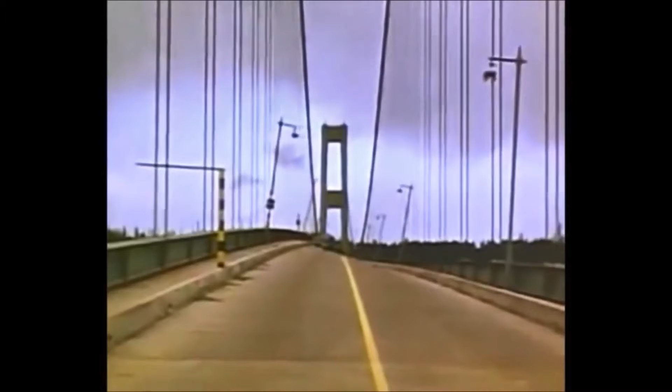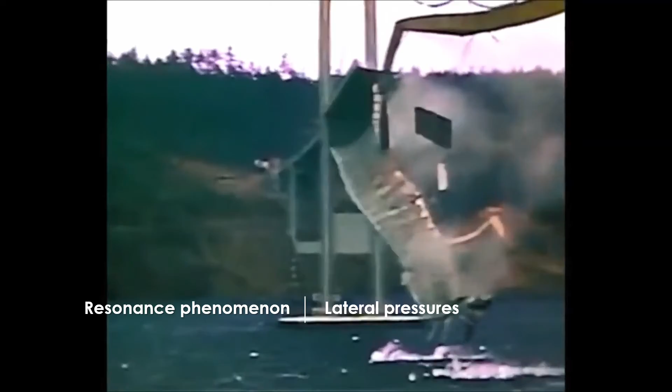Our bridge is shaking absurdly. The reason why the bridge swings in the wind, enough that even a man can walk on it, is due to its natural frequency. Any building has a natural frequency. The vibration that reaches the natural frequency through the resonant phenomenon causes the building to shake even more. When the building cannot withstand the lateral pressure, it finally collapses.

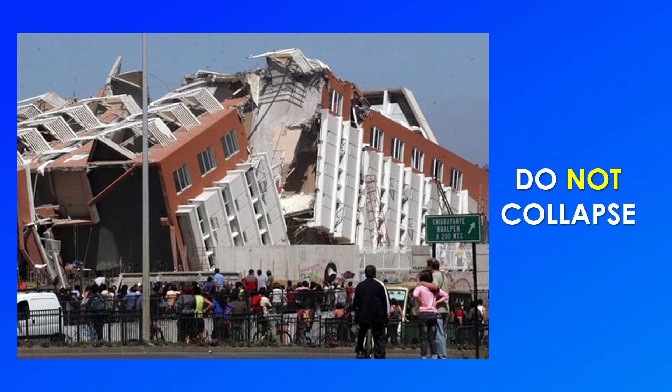High-rise buildings are prepared for wind and earthquakes so that they do not collapse. The reason for a skyscraper's collapse from these factors is essentially the same: it's because of the vibrations I mentioned earlier.

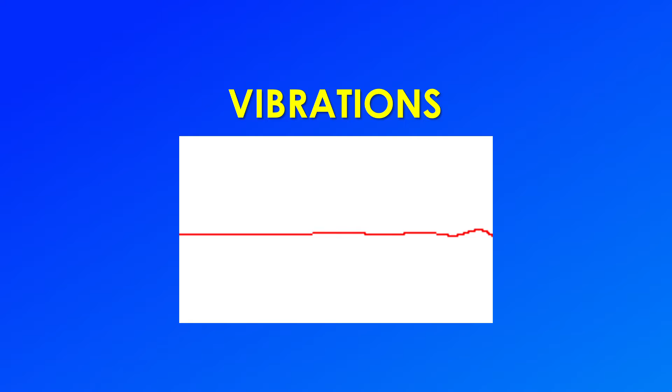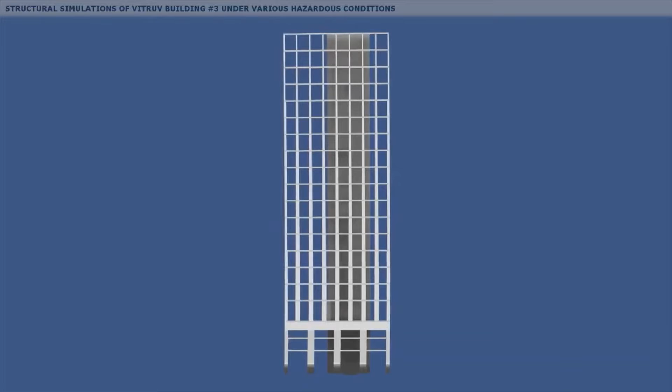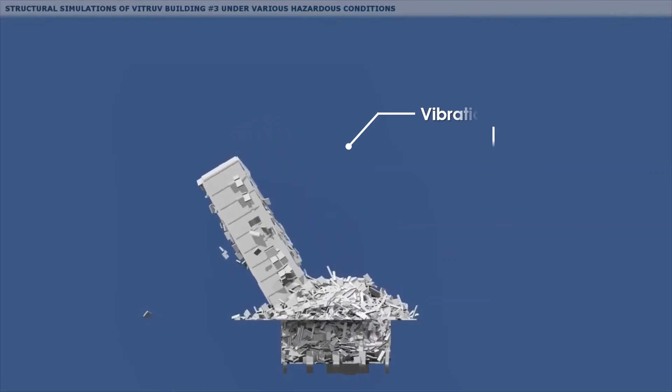Earthquakes cause vibration in the ground beneath buildings. As shown in the video, when an earthquake occurs, the building vibrates. I'll show you the process of collapse in detail. The building initially holds out with inertia, then moves the same as the vibration as the frequency increases, and the walls or pillars of the building cannot withstand the lateral pressure caused by vibration, so they collapse.

However, the fact that a building is shaken by vibration is not in itself evidence that it is not earthquake-safe. Rather, a well-shakeable building is a safer structure that withstands earthquakes better.

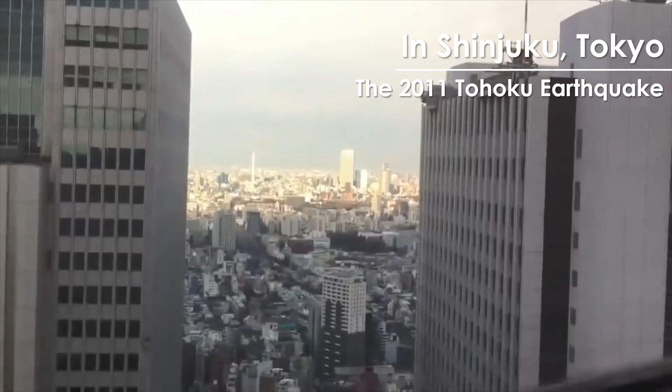This video shows a skyscraper in Shinjuku, Tokyo, where vibration was transmitted during the 2011 Tohoku earthquake. As you can see, the buildings shake side to side as if they are dancing. This is not a poorly built building, but rather a well-designed seismic building. It is designed to shake flexibly and naturally according to the vibration.

When it comes to how much a building is prepared for an earthquake, it's not a matter of strength, but a matter of flexibility.

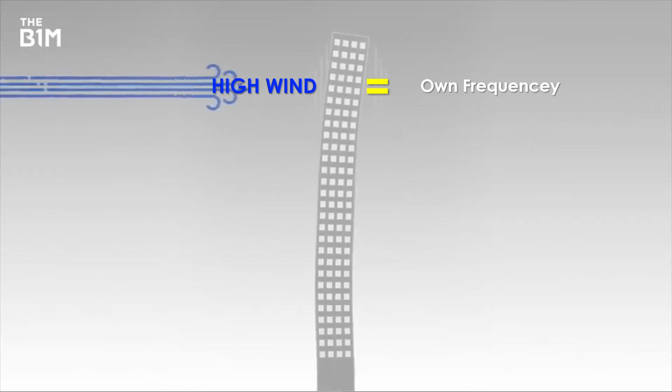The same goes for wind. Each skyscraper has its own frequency. While any such movement may initially be minimal, high winds can create vortices that can match the frequency of the building they move around, causing noticeable swaying and shaking motions for those inside.

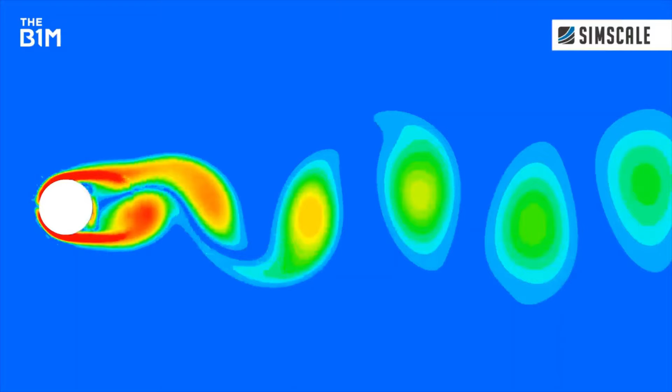Most buildings withstand irregular wind vibrations. The problem is that the vortex is not a regular wind. As wind moved around the top of those tall structures, vortices were being created in a process known as vortex shedding.

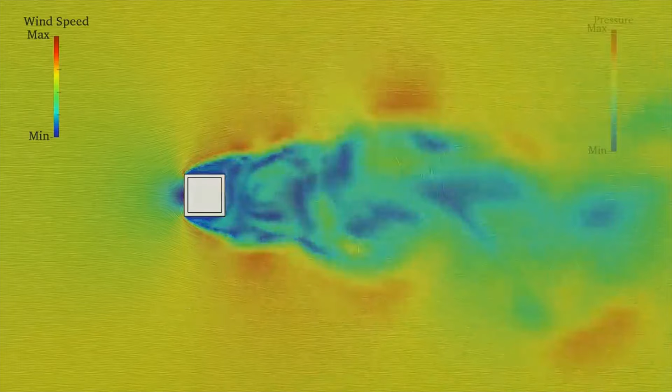This process, much like water flowing downstream, acts differently on obstacles depending on how streamlined they are. In the case of these buildings, the sheer block walls created a bluff obstacle that wind had to flow around. As strong winds moved around these structures, areas of low pressure emerged on the opposite side, creating suction forces that pulled at the buildings, causing them to sway back and forth.

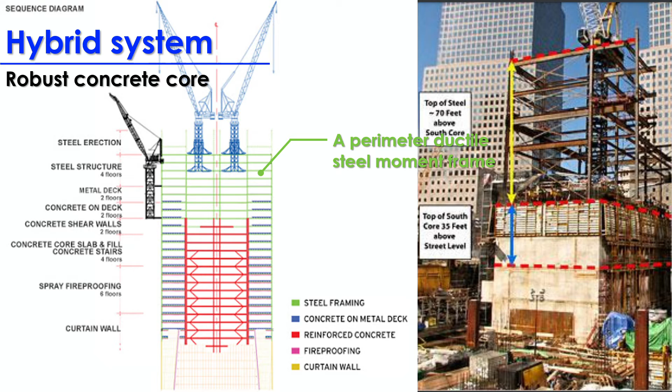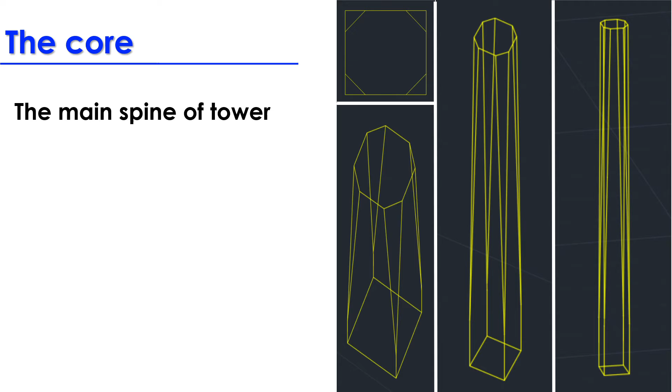The tower structure is composed of a hybrid system combining a robust concrete core with a perimeter ductile steel moment frame. The reinforced concrete core wall system at the center of the tower acts as the main spine, providing support for gravitational loads as well as resistance to wind and seismic forces.

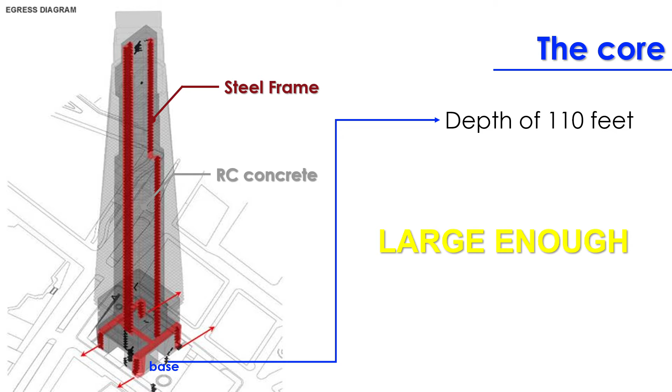The core is approximately square in footprint, with a depth of about 110 feet at the base, large enough to be its own building. It houses mechanical rooms and all means of egress. The core structure is compartmentalized with additional interior shear walls in orthogonal directions.

The concrete strength ranges from 8,000 psi to 14,000 psi from the base to the top. As for crumbling, the towers are held up by a steel framework that is elastic enough to take the bending without damage, giving the building enough flexibility for safe vibration along the frequency of an earthquake.

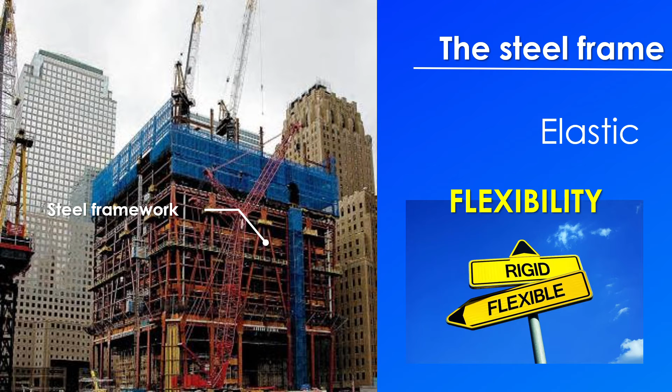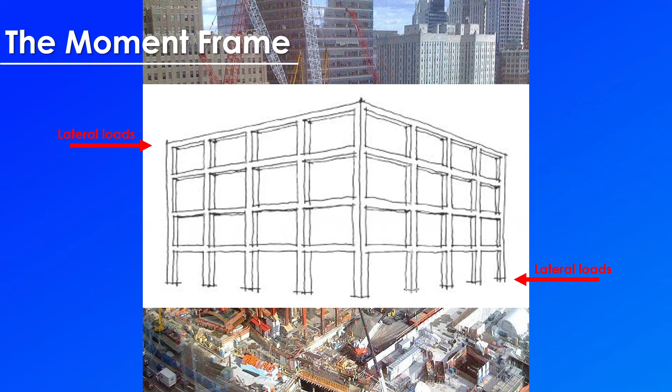A ductile perimeter moment frame system is introduced for redundancy and to further enhance overall building performance under lateral load. The perimeter moment frame wraps around all vertical and sloped perimeters, forming a tube system.

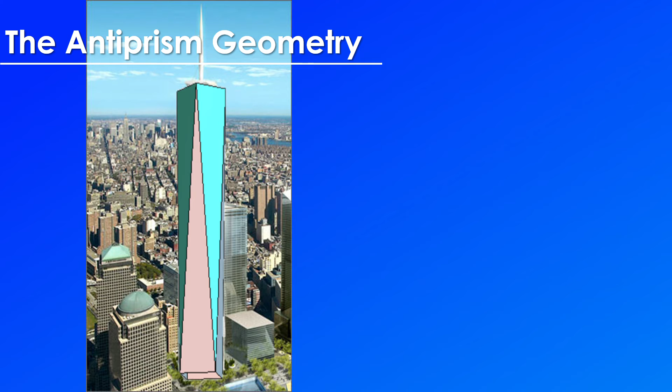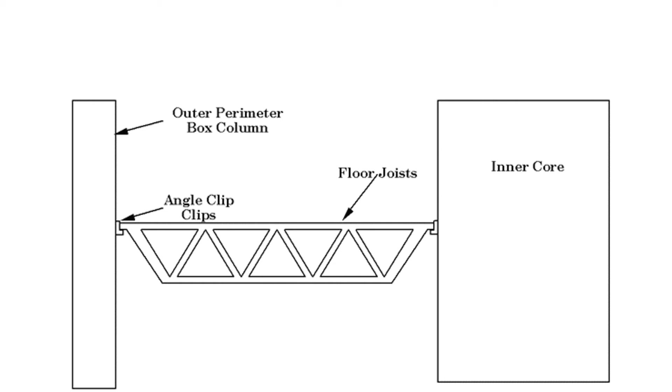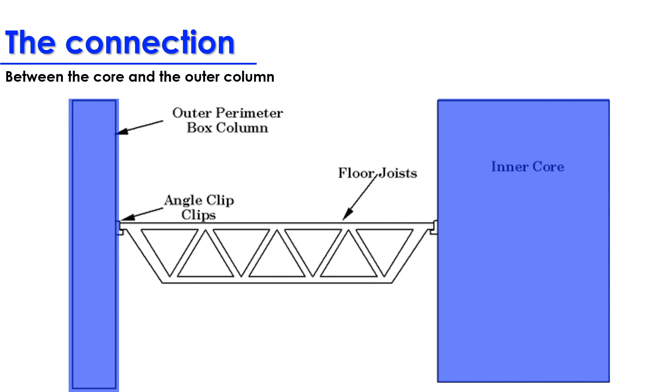Along the height of the tower, the antiprism geometry creates unique structural conditions, which necessitated the design and fabrication of special nodal elements using relatively large plating with significant capacity for load transfer. For further enhancement of the lateral load resisting system, the concrete core at the upper conical levels is connected to the perimeter columns via a series of multi-level outrigger trusses in both orthogonal directions.

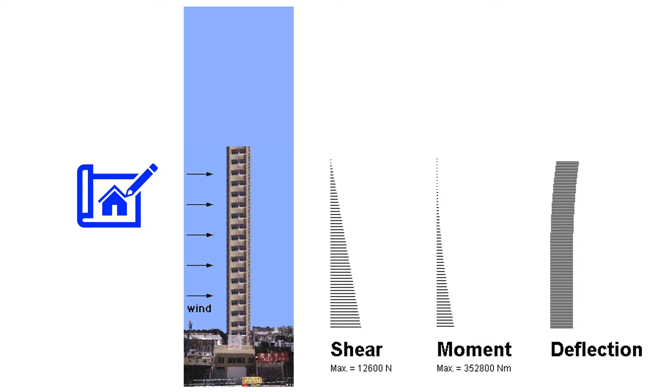During the design of a building, special care is taken when considering wind load. Buildings taller than 10 stories would, for the most part, require extra steel for side-long framework. Also, One World Trade Center's height and its slenderness imposed stringent demands on the overall strength and stiffness of the structure.

The structure has been designed for wind load requirements of IBC 2003, with due consideration of NYC local wind climate conditions. In order to meet those demands in an economical way, high strength concrete was utilized and it composes the core of the tower.

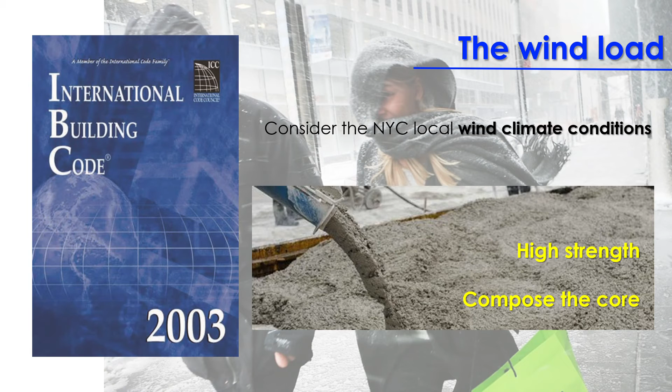In addition, a series of wind tunnel tests were performed to ascertain a more accurate measurement of wind loading and wind responses of the tower with respect to hurricane wind load effects and human comfort criteria.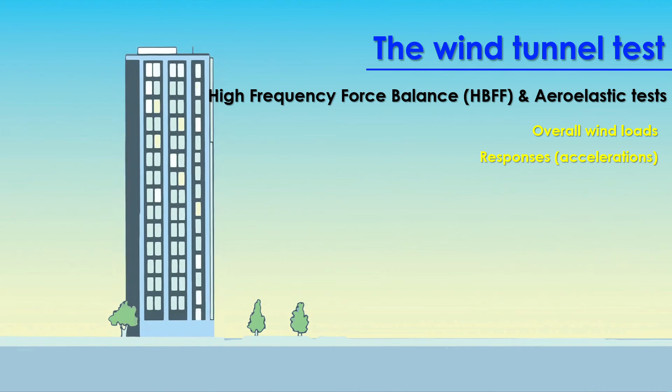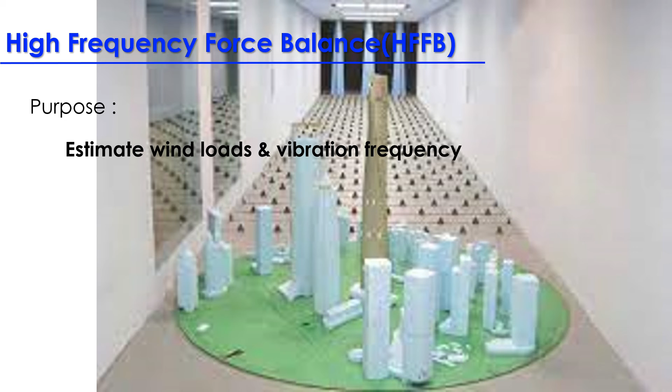A high-frequency force balance test is used to estimate wind loads and vibration frequency of the building to be utilized in structural design, and to measure vibration acceleration of the building to evaluate serviceability.

In the HFFB test, a light and rigid model is used to measure wind loads by six components. The wind force coefficient is computed from time-dependent force data, and response of the model is evaluated by spectral modal analysis.

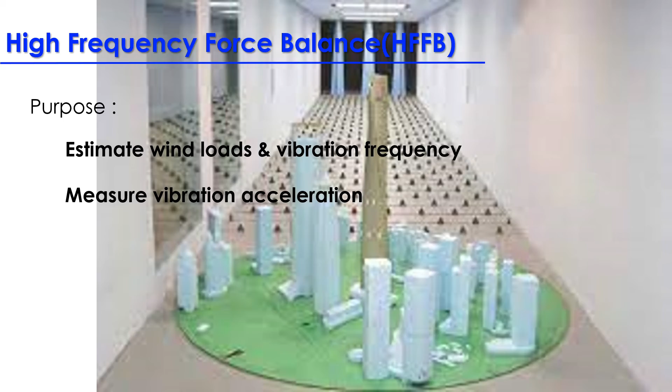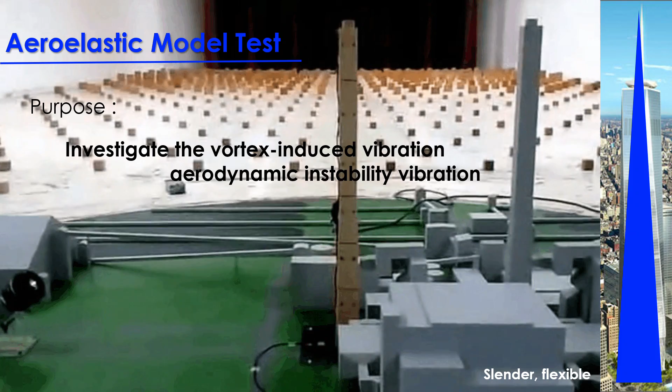Aeroelastic model testing is suitable for slender, flexible, and dynamically sensitive structures like One World Trade Center. The objective of the aeroelastic model test is to investigate vortex-induced vibration and aerodynamic instability vibration within a range of target wind speed. The aeroelastic model is designed with precisely scaled dynamic properties of the full-scale building, including stiffness, mass, natural frequency, and damping properties of the structural system.

Responses are directly measured in the wind tunnel using non-contact displacement meters or accelerometers. Next time, we're going to study the overall structure and frame of the building, as well as the facade. That's it for our today's presentation. Thank you for listening.